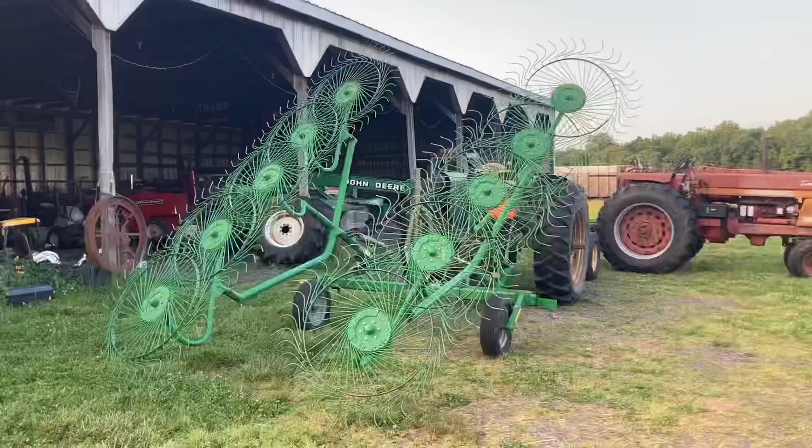Dad went and got another 30 teeth, so it's 60 some teeth now. We put them all in, and we're still 5 teeth short. But we can rake hay with that, being 5 teeth short. We just finished that part. Now we got to find a bolt, put in the rest of it before we can go to the field with it, but with a bolt missing out of the tongue.

Other than that oil change on the 4020, that one should be almost ready to do something. But we still ain't fixed the diskbine yet, so we got to get that done yet.

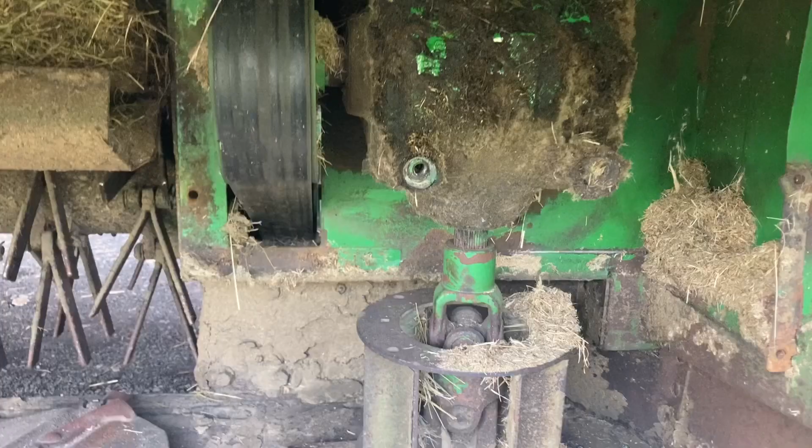Howdy y'all, May 23rd. Sitting there looking at taking this diskbine apart and seeing what all we got to do here. We just pulled this shield off the inside to the secondary gearbox.

Tried to take this cover off, but I ain't man enough to turn that wrench. The other gearbox sits right on top of this gearbox in here.

So I want to take this one off, and I've never had it off. Dad took it off one time, I think I seen it off one time. That was about it. Let's see what's going on here.

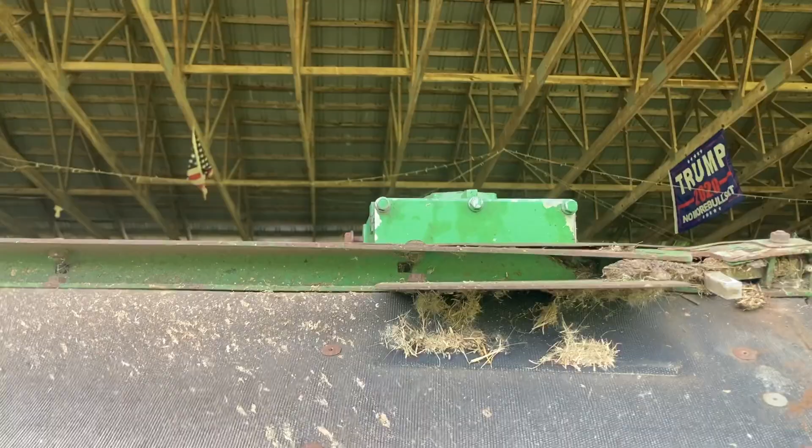I gotta figure out how to tear that gearbox up there apart so we can fix this thing. This door here was a pain to get open. People stopped running into trees.

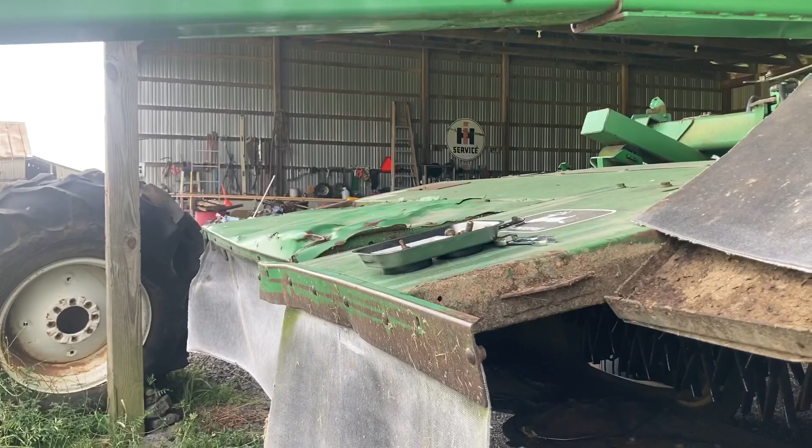We'd have a pretty nice diskbine here for its age. But that's what happens, yes that's right. I was the first one to run into a tree, but I ain't the last one, and it wasn't the last tree either.

So anyways, we're trying to take this apart so we can see what we're doing here, because we don't know what we're doing at all. So I don't know what Dad's doing.

Everything down here don't look terrible. We just need to hit it with the leaf blower. Now let's look at figuring out how we tear this apart.

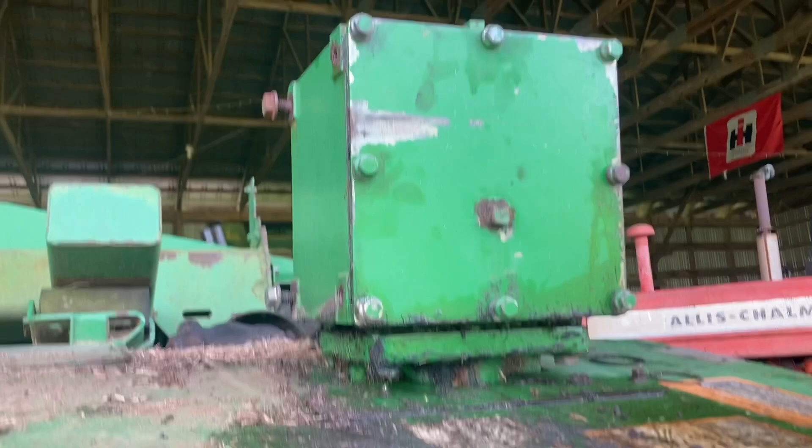Take this cover off, and I think everything's got to go up through the top to separate. At least that's what John Deere told us. I don't know.

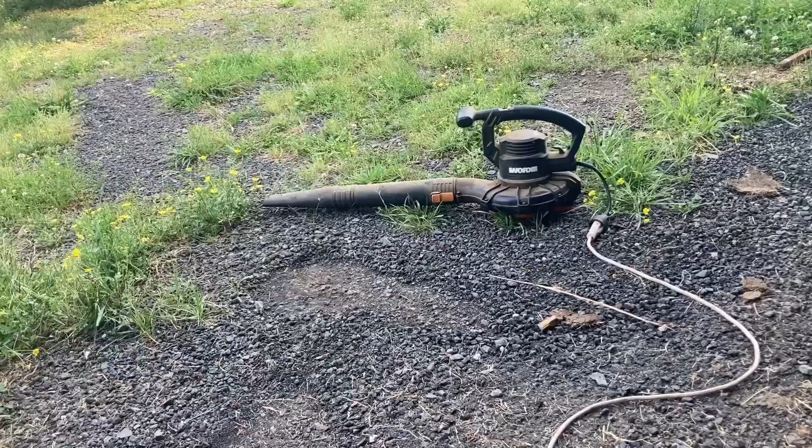Y'all see that cheap leaf blower? It's a cord leaf blower. Well, a fellow was getting rid of that one day, said it didn't work, so I took it. Guess what? It works. We don't use it much, but you know, it's free. So we took it home, and now we have it, and it works.

Dad brought it back here to blow the machine off, so I just used it. Trying not to get into all that, we'll do that another day. That'll make a bigger mess, but we just wanted to clean up this area that we're gonna work in and get rid of all the stuff on the ground that fell off. So yeah,

Sometimes when it's free, go ahead and take it. You might have to take the effort to throw it in the trash, but you know what, sometimes it works. But don't be a hoarder.

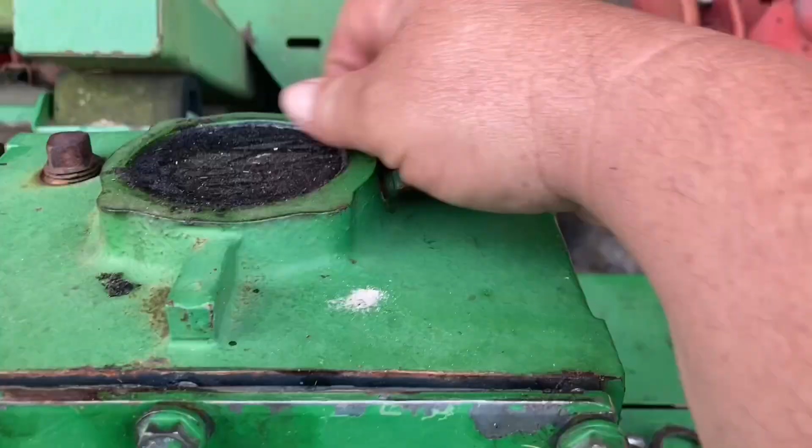I think I got to take this out, and then this cap comes out somehow or another. Might have to drive it out, but I'm gonna take this apart, even if I don't know what I'm doing.

Dad said one time before, this cap on top tried to come out. He beat it back down in there.

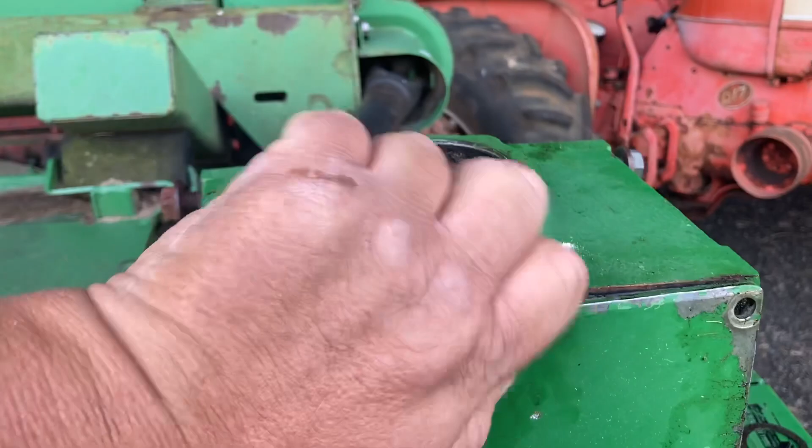Well, we removed these covers on the top, tried to take these bolts out of the bottom, take this whole gearbox clean off. There's like another chamber down in here.

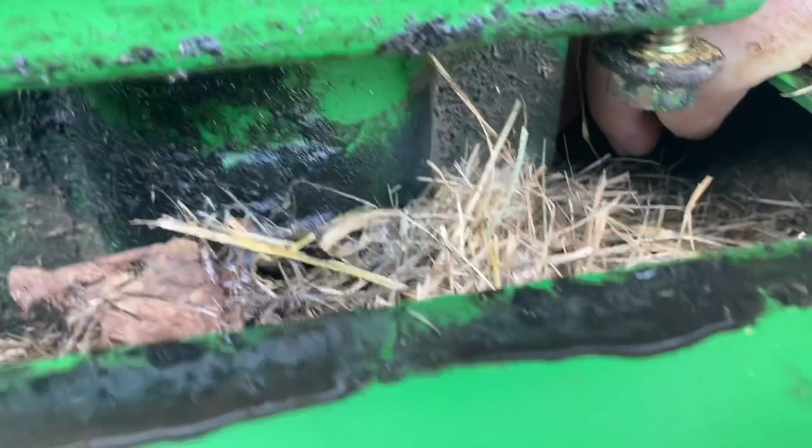Well, we took a screwdriver and a hammer, and drove that cap up out of there. And then we took some pliers and another pair of pliers and got that snap ring out.

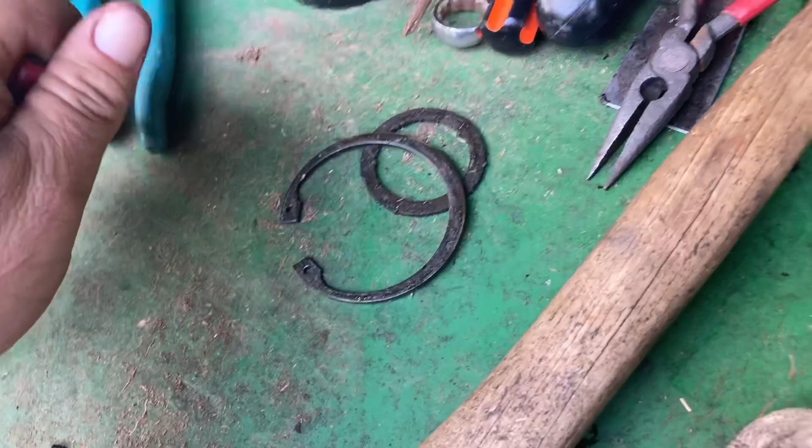Well y'all, we got the gearbox off. It could have came off this whole time, but we couldn't get it to go. So after beating and banging on it, to get the bearing out the top, the whole gearbox decided it wanted to loosen up to come on off of there. So we pulled it off.

We tried the snap ring pliers, but we ain't got no good snap ring pliers. Take snap ring out, we got the other snap ring out. But we got the whole gearbox out of there.

If nothing else, he can take it to John Deere tomorrow and get him to rebuild it, because we still don't have enough parts to fix it, actually, I don't think, he said. But anyways, it's a part. It's farther along than we were yesterday.

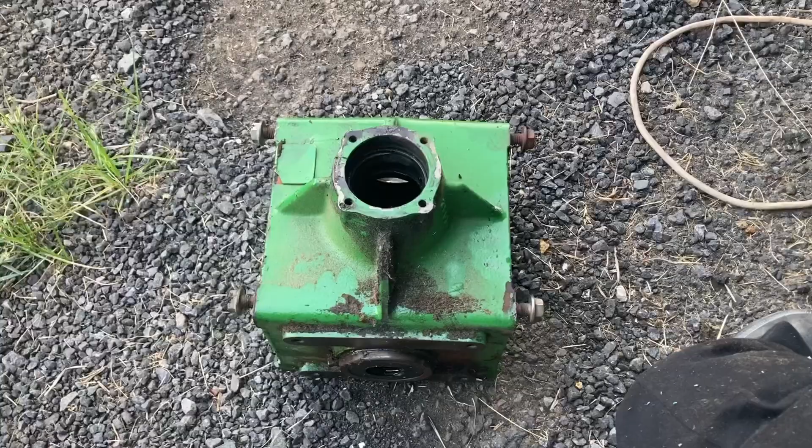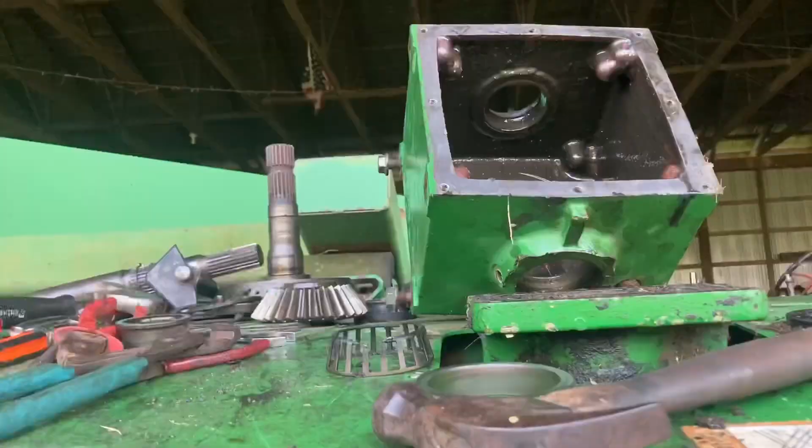Well, we got to get the races out of the gearbox now. I got the rest of it tore out of it, one piece at a time. Well, we can't get the snap ring out, we don't have any good snap ring pliers.

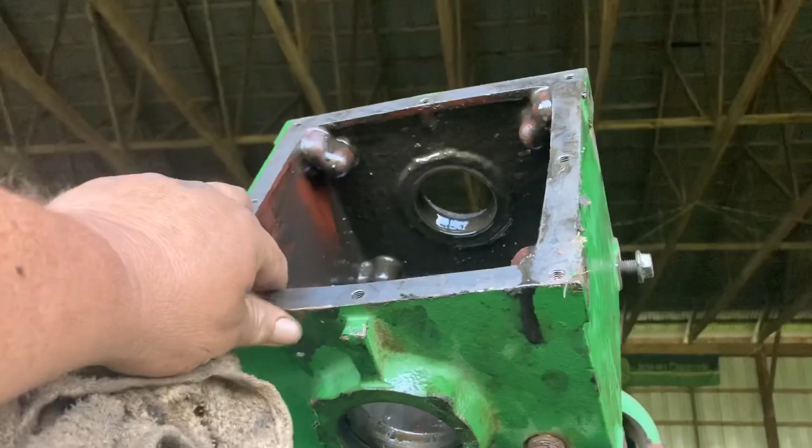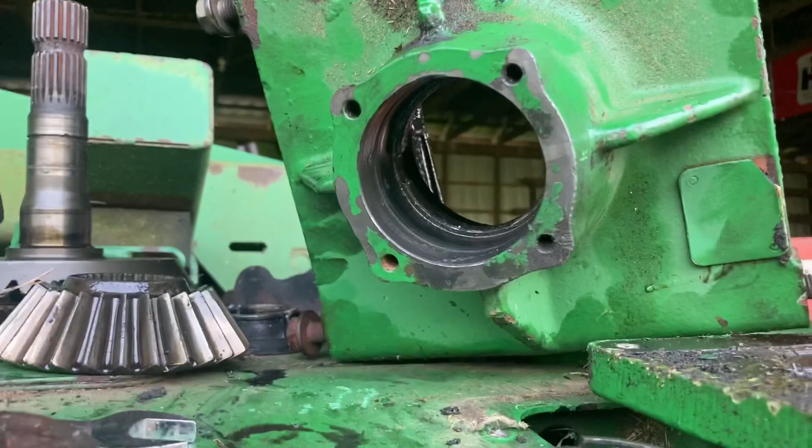We don't do this enough to know exactly what we're doing, but wherever it's at, there's a snap ring and a gearbox. We've got one more race and a snap ring to take out of there, and then we can put it back together.

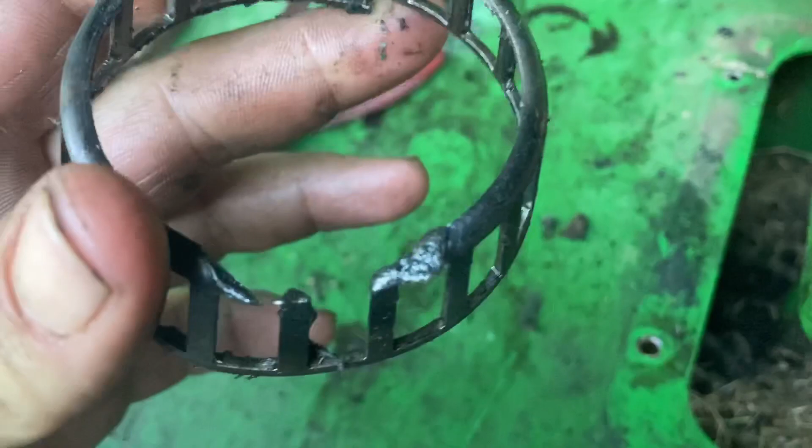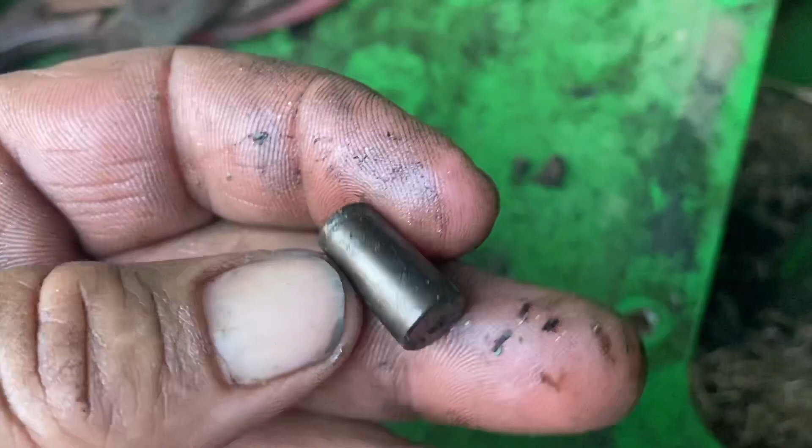If we had cheaped it and just put the bearing in the back, this is what we would have missed: this bearing was missing a couple rollers, it was broken and eat out, and it was missing a couple ball bearings. So if we'd have cheaped it, we'd be tearing this back apart again.

But I need some better snap ring pliers, and I've got to get this race out yet to put it back together. Still have no idea what I'm doing, but I'm doing it.

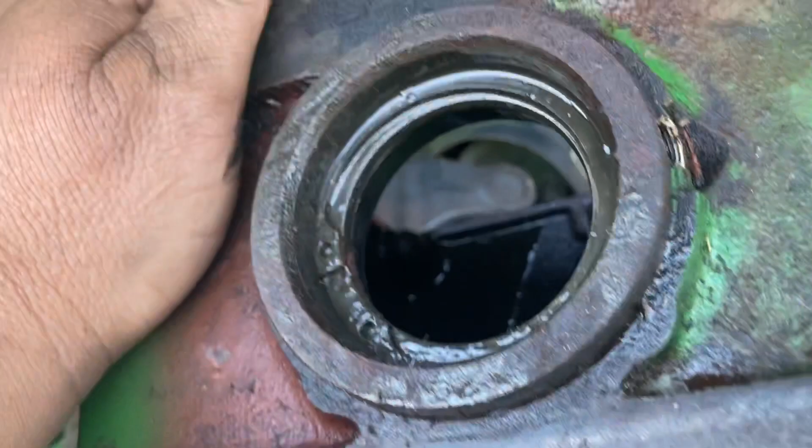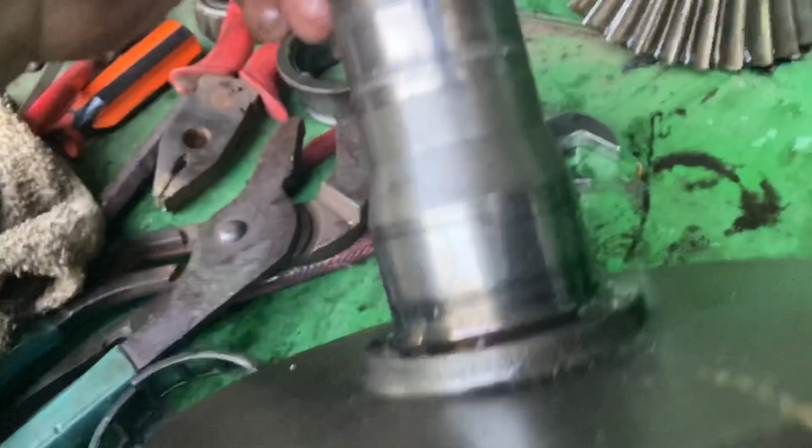Our shafts got a little bit of a bugger on them, but I think they'll survive. Got a little bit of a booger. Let me spin this gearbox around. Our gearbox had a little tiny bit of a groove in it right there, where she was rubbing.

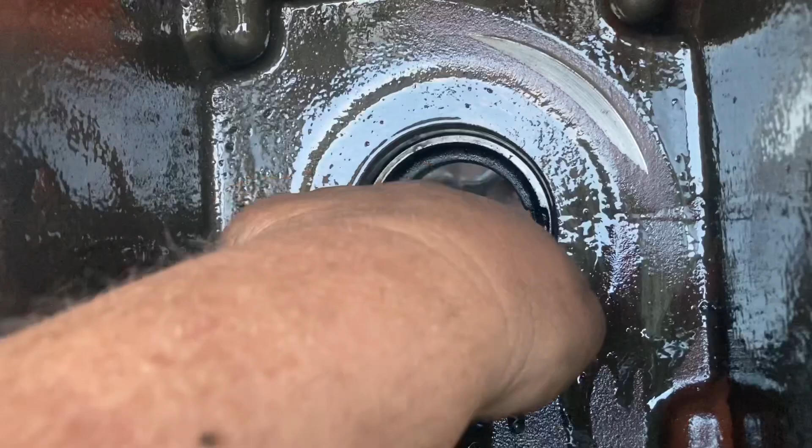Anyways, this inner bearing was gone and the outer bearing was completely missing in there. So the rest of these were all good, but here's a shaft.

This is how this goes together, wherever it's at, this other shaft. This spline right here goes down in here. Let's see if I can get it out of there.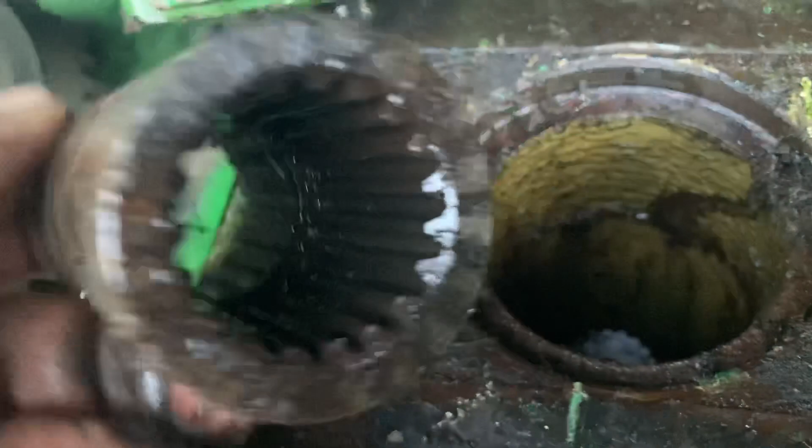There's this collar that connects these two gearboxes together with a snap ring in the middle. So that comes up the same way inside of this casing, and then this with the snap ring just drops down in there, and the other one sits right on top of it.

After we got the beating and banging, I guess the two of them decided they wanted to loosen up a little bit and they started moving. We were able to lift the box out of it, but we couldn't get the box out first - it wouldn't move at all. But after he turned it a little bit, it came loose.

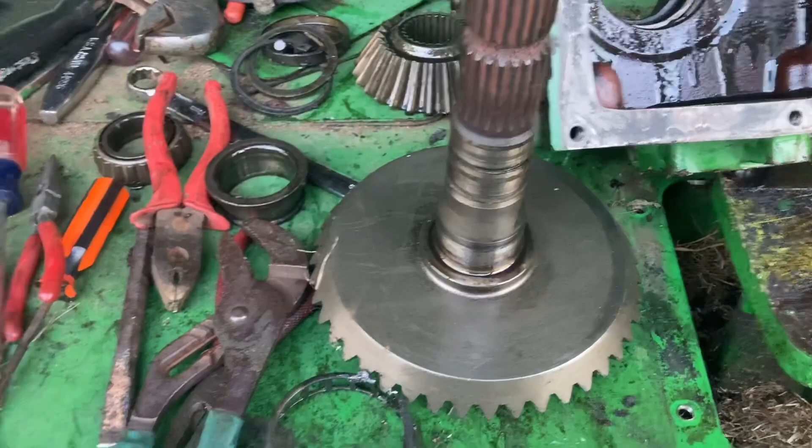Anyways, that's all our parts. Now we need some snap ring pliers, because wherever, these little cheap ones we got here weren't sufficient enough.

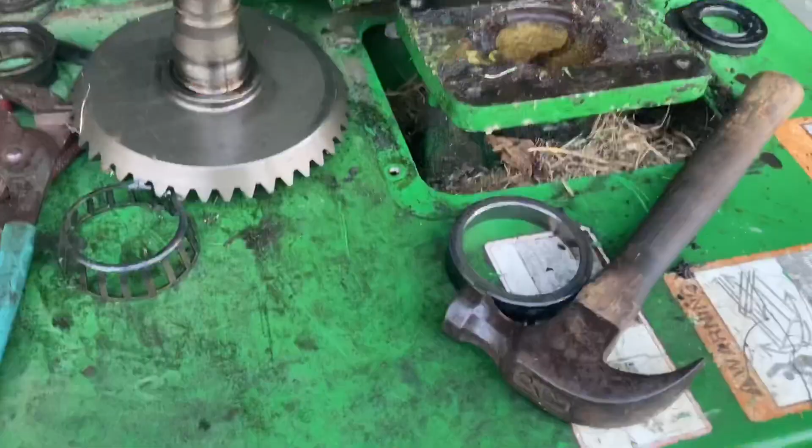John Deere forgot two parts. They gave us all the parts, but they forgot this race and this cap up here that goes on top. Of course, I already damaged it. That could probably be put back in there, though I'd have to straighten it out. But those are the two parts they forgot - they gave us this bearing, but they forgot the race.

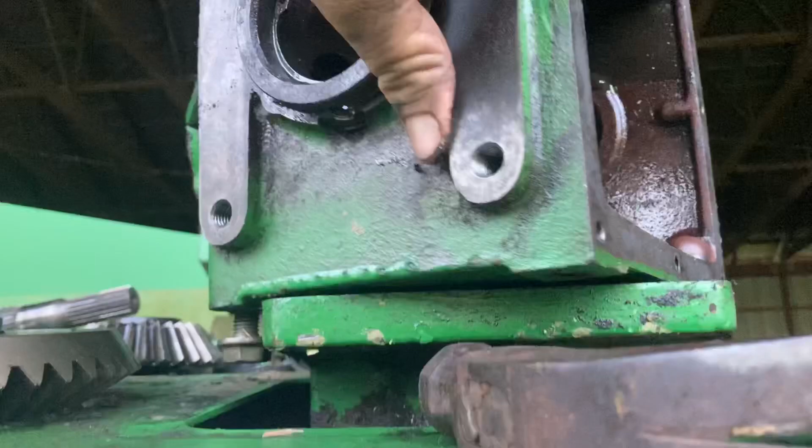The snap ring is still in there, but I got the race out, I got the spacer out, I got it all apart. The snap ring won't come out, so I need some new pliers.

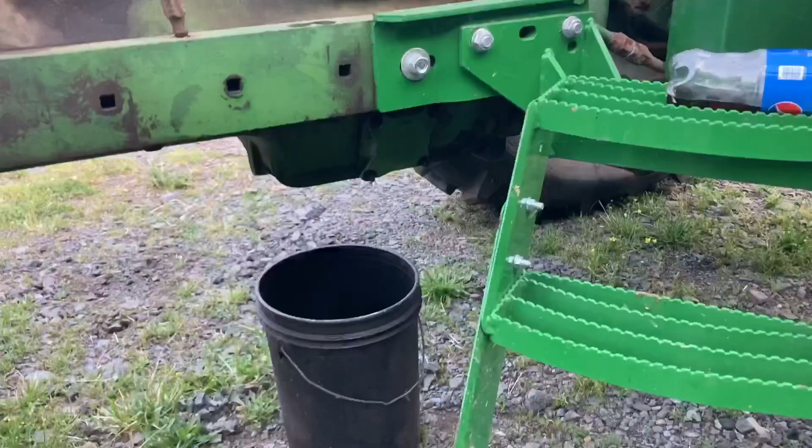I was sitting here changing oil in the 40-20, but I didn't get any video of it. Anyways, pretty standard process.

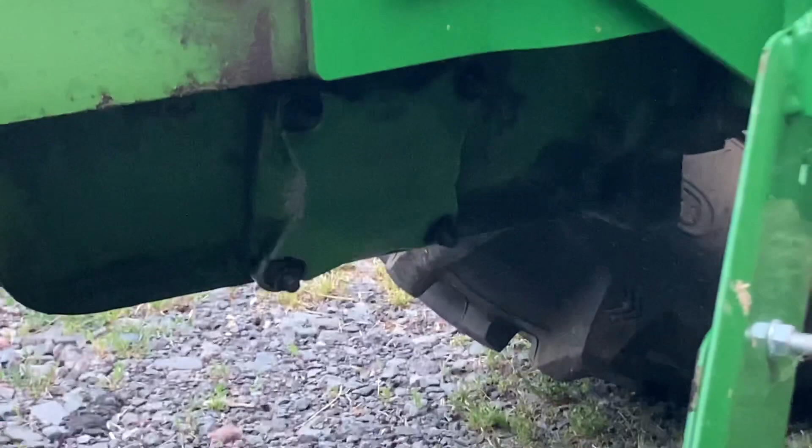That cover right there, take those 4 bolts loose - that's your oil filter. Oil plug underneath, drain the oil. On the other side right here is your dipstick, that's where you fill it back up. Pretty simple process. This tractor doesn't hold a lot of oil. I don't know how many quarts it actually holds, but I put like 4 quarts in there and it's up on the stick.

Of course I hadn't started it yet, but I just started it here a second ago. We'll check it tomorrow. Yeah, for some reason I guess John Deere didn't think it needed a whole lot of oil compared to some of the other brands. But anyways, that's what I've been doing this evening.

Dad went and got the rest of the parts for the diskbine, and he's sitting over changing blades on it when I got back here. Hopefully we'll get that put back together tomorrow or the next day, and get the rock and roll in here. I do need to change the oil in the 10, but we'll do that tomorrow because it's already time to go home now.

So somebody went out the driveway trimming trees with their big piece of equipment. Look at this, look at this - all the way to the driveway like this. I'm assuming it was a big John Deere with a disc. But anyways, they was trimming the trees.

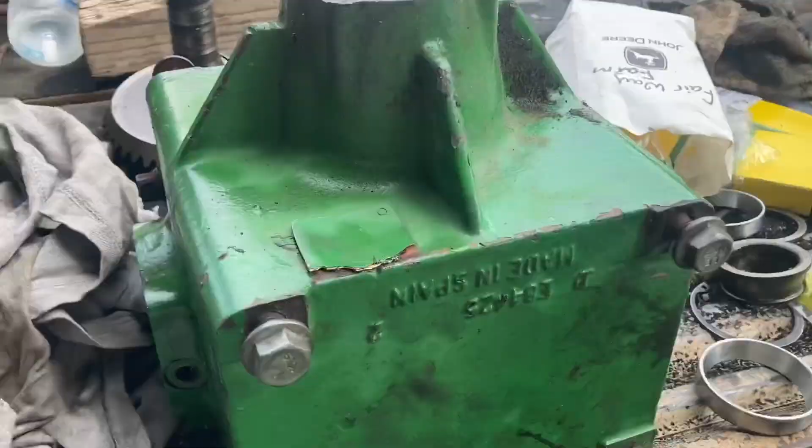Oh, I have much room now. Look, Dad. Howdy y'all, March 27th, I think.

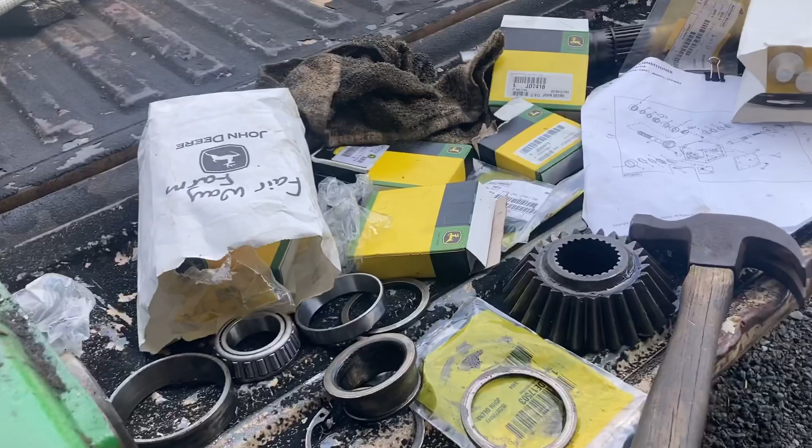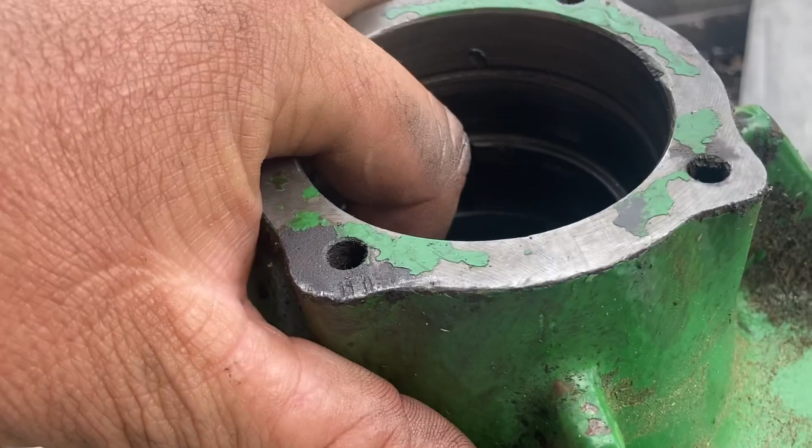We're trying to put this gearbox back together. We don't know what we're doing, but we're doing it. We got one race in there on the inside, and we got the bearing on the shaft to match up on that side. Now we got to put this side together, but we ran into an issue.

We got a little bit of bearing here that we need to get out before we try to drive past that. Probably not a big deal, but we're gonna touch on that a little bit before we try to drive the race through it.

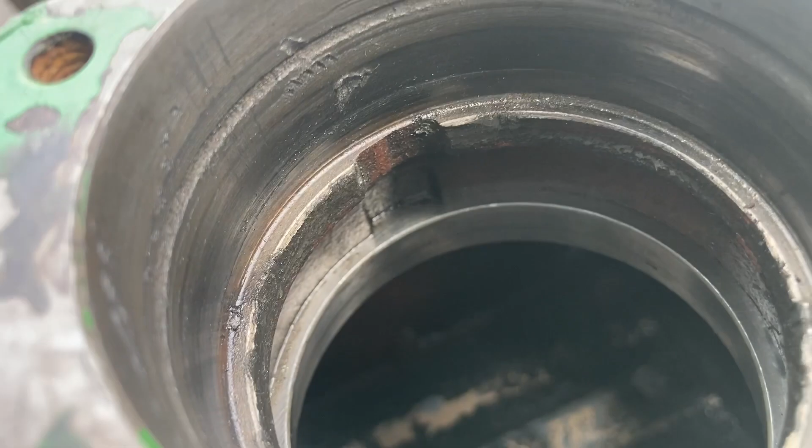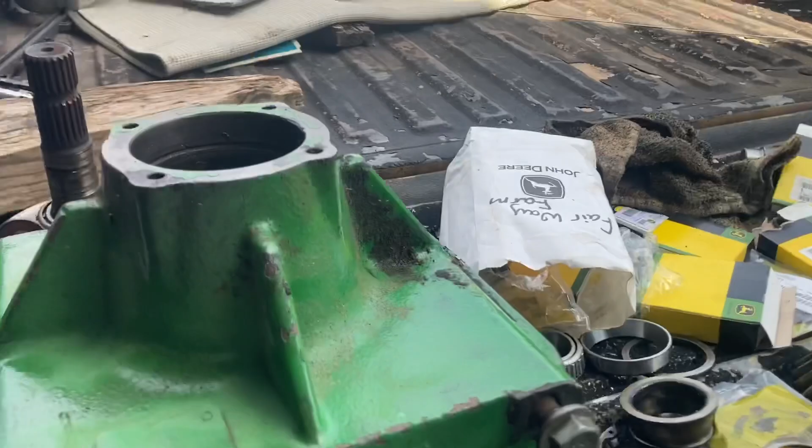But anyways, we don't know what we're doing. John Deere gave us the wrong parts. Most of the right ones, but we ended up with a couple of the wrong ones. But it's all good, we'll make it happen. We got enough here to do it, we just got a few extra, that's all.

But we don't know what we're doing. We don't do this every day. If we did this every day, this would be no big deal. But we got that one in, we got that one in, this one here will go in, we already had it in. Then we got to put that one back in. I'm trying to get this one and the big shaft in there to get this part put together.

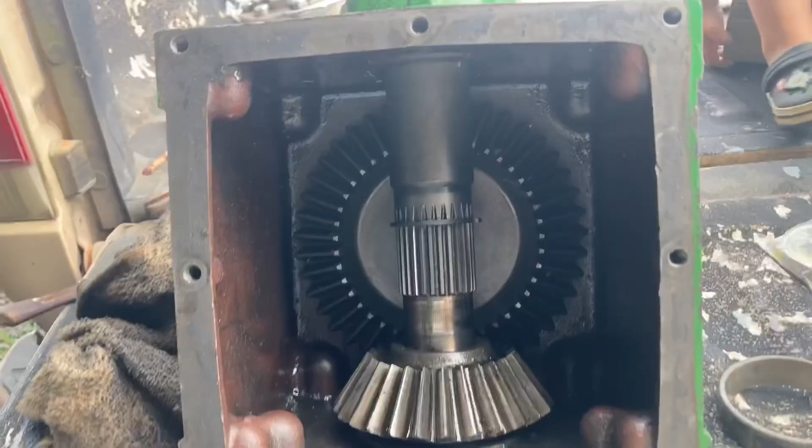Gear and driving the bearing. We need a short block. She went to find one. Well, we're making it look like something.

I don't know what to tell you.

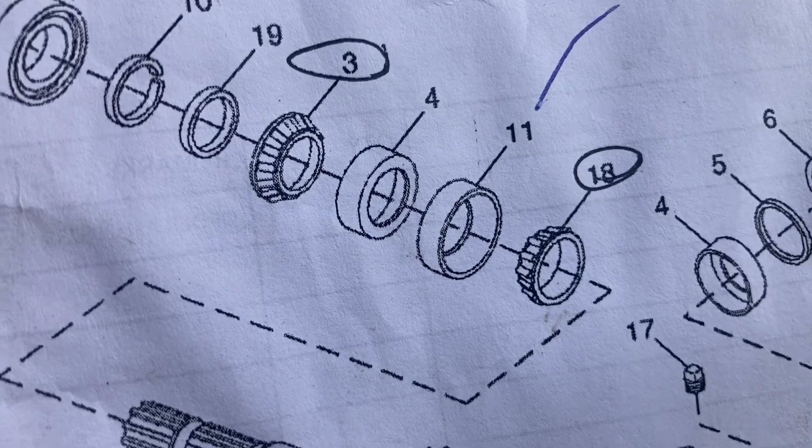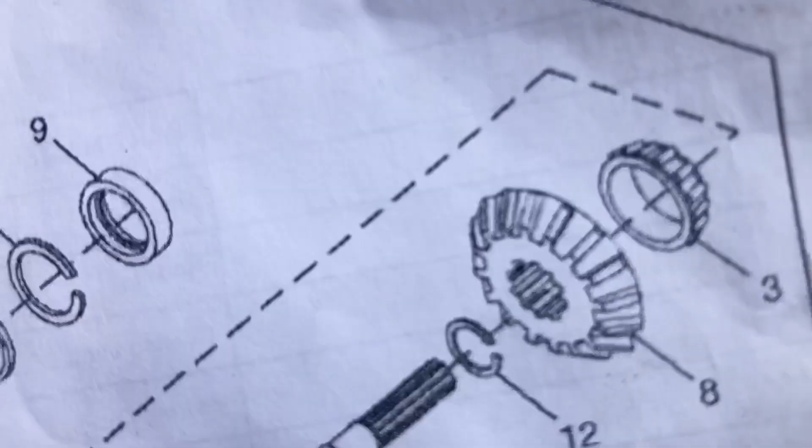So I'm looking at John Deere's diagram, and check out what they did with this bearing right here. Over here you see the race and the bearing. Down here, they got the race and the bearing going the wrong direction. Ain't that something? Over here, they show it right over here on this side. But over here, they got the bearing flipped the wrong way, on the wrong side of the race.

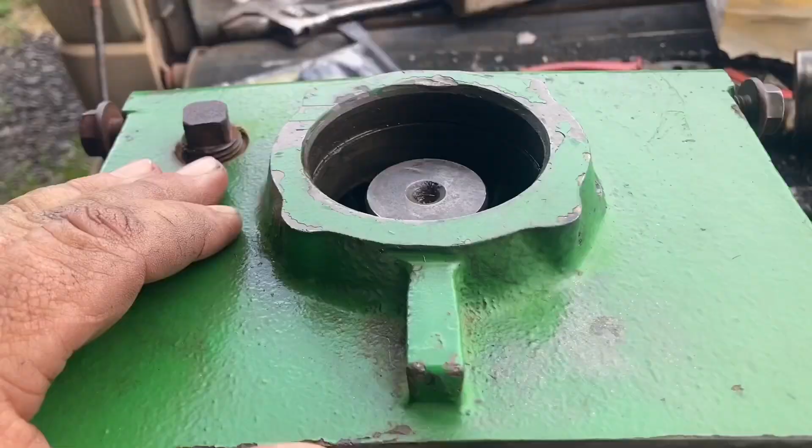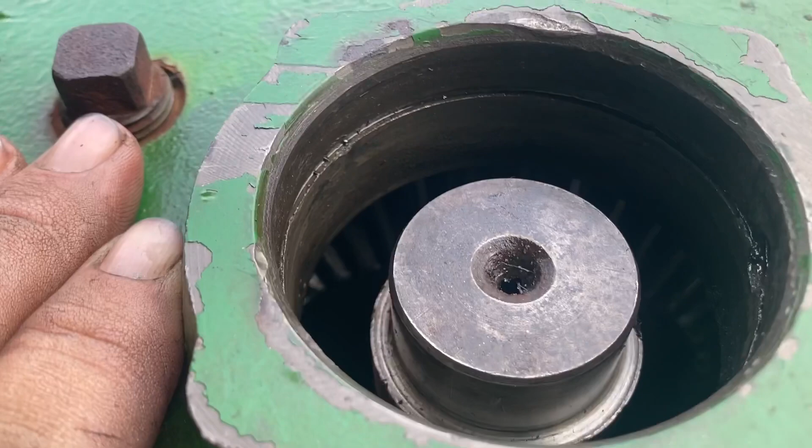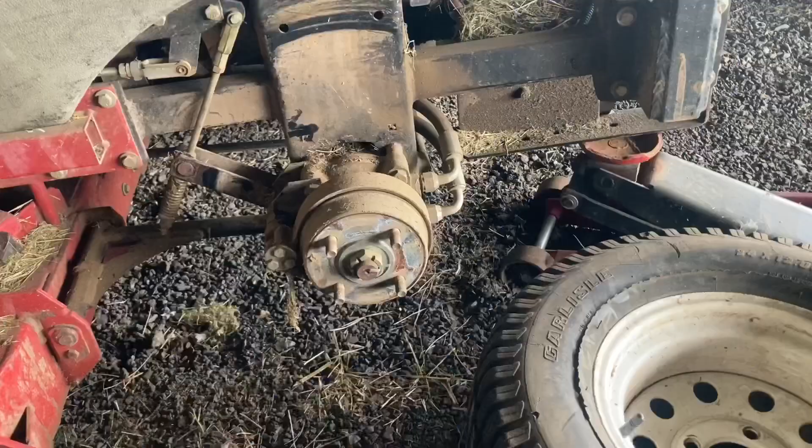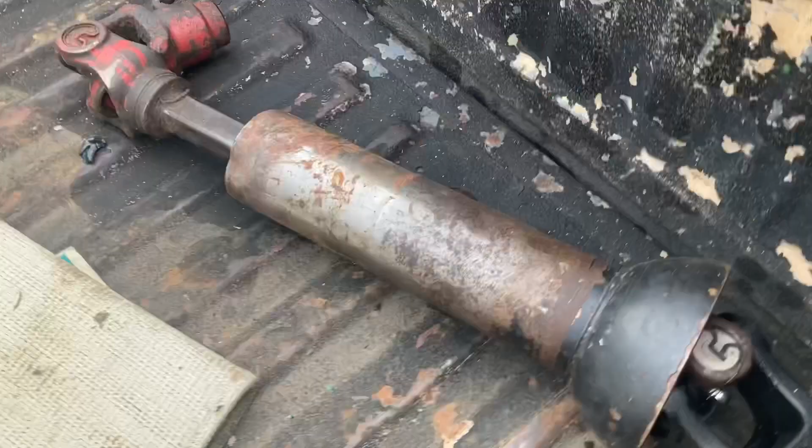Well, we gave up on the diskbine because we don't know what we're doing. So I'm gonna put this lawnmower tire on here, I don't think I can screw that up. Well, we got the PTO fixed for the baler, I'll go over here and put that on, since we can't figure out the gearbox on the diskbine, and the bearing fell apart.

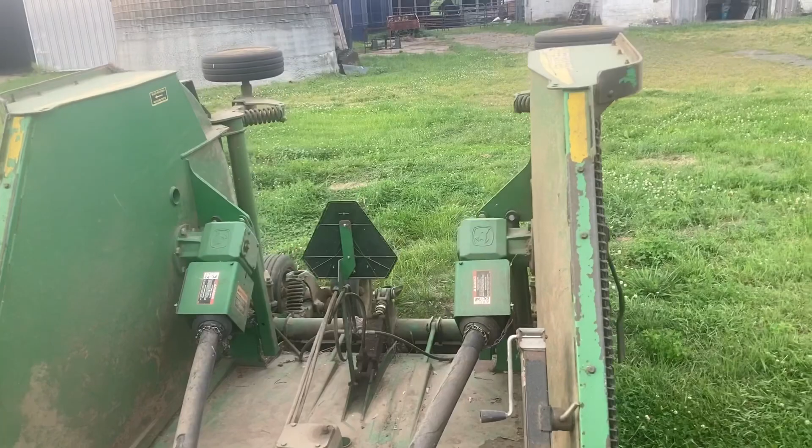Well, we're tired, so we decided to do something where we don't have to be too energetic. Day's almost over, right?

We're gonna come out here and just make it look a little better. Knock these weeds down and come back and rake it and see what it looks like when you bale it. We ain't never done that before, but we're gonna do it, just for the heck of it, see what happens.